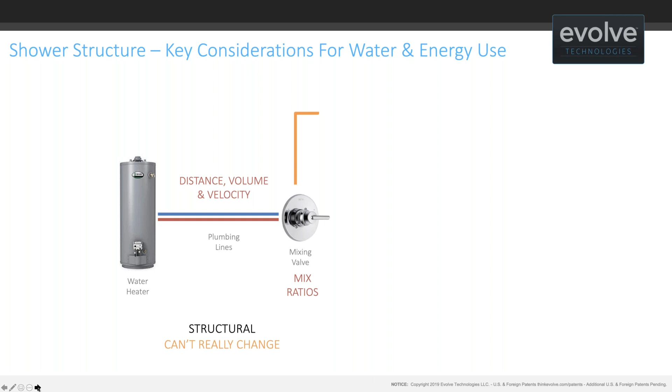On the behavior side, there are really great opportunities for change. So mostly everything we're going to talk about today is how do I deal with the structure I already have in place, which I can tell you is most likely very inefficient, and it has great impacts on behavior. How can I address the behavioral side and achieve something that isn't punitive, doesn't take water or energy away from you, but adds a ton of value in terms of convenience and efficiency for your tenants?

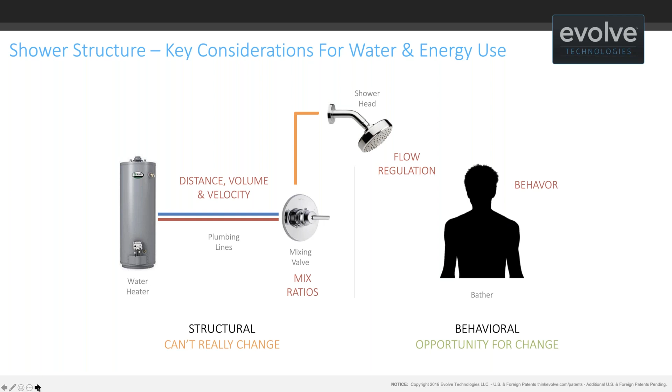In 1992, the federal government came up with the Energy Policy Act, which started to regulate shower head flow rates for the first time. They regulated them at 2.5 gallons per minute - basically saying a shower head, given a normal or typical pressure inside someone's building, apartment, or home, can't go more than 2.5 gallons per minute, which was a big change.

This was all back in the day when everybody said, 'oh my gosh, I don't want a low flow shower head, these things are terrible.' Basically what happened is the federal government put together this regulation, but manufacturers weren't really ready for it, so they didn't have shower heads that could perform really well at 2.5 gallons. However, a lot has changed since 1992.

Many people may be familiar with WaterSense and the new WaterSense showers that have been coming out for several years. WaterSense today puts a limit on a shower head at about 2.0. In fact, it's hard to buy a shower head today if you run down to Home Depot or Lowe's that's going to be anything better than 2.0. The market has basically come in line with WaterSense, which is half a gallon more savings per minute than what the federal government allows.

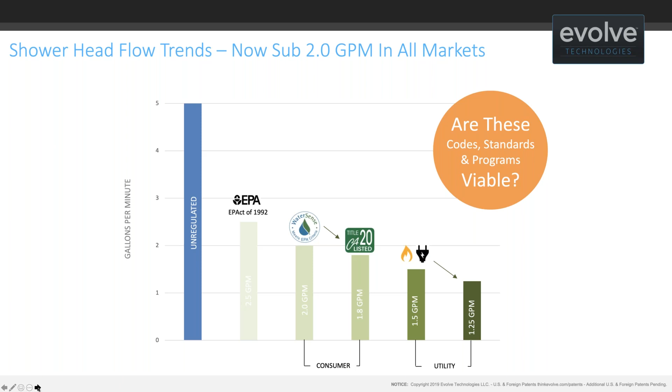And I would tell you, based on my experience talking with people, we're already there. Once you get into the 1.5, 1.25 range, those are the products that are starting to get put in, but it's borderline whether that's going to provide an acceptable experience, or people are going to revolt even more than they have in the past and say, I totally don't want a low flow shower.

It's as much about relaxation and comfort as it is about getting clean. People don't like to struggle with a low flow shower head. A lot of times they don't like how they feel, they don't feel warm enough within them. They know they're sacrificing, and sacrificing in the shower isn't something we want to give up. What's really interesting in terms of behavior is people ignore the information on efficiency - even if you give it to them, they won't take it into consideration. They just don't want anything to do with the low flow shower.

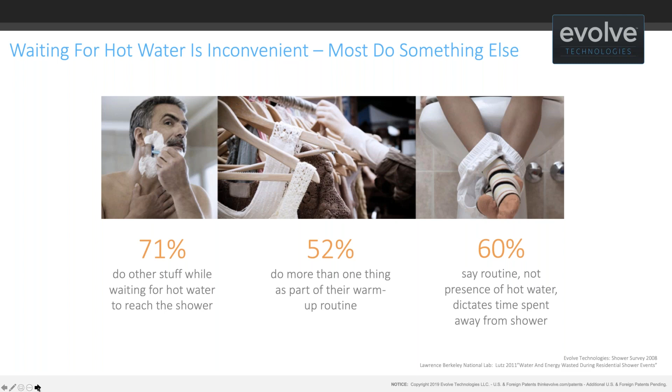Does that make sense to everybody so far? Any questions for where we're at?

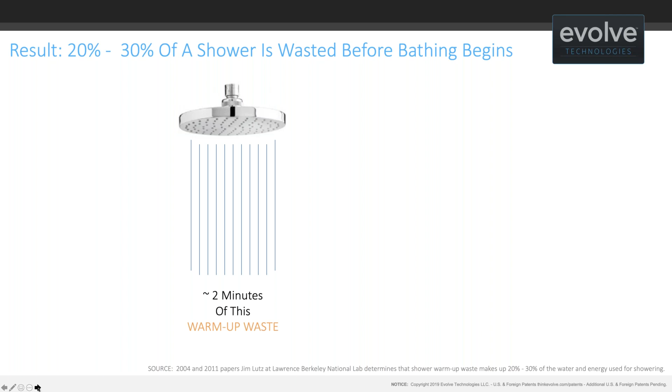So as a result of our behavior and the structure where it takes a long time for hot water to get to point of use, what we essentially see is that a shower breaks down into this: I've got 2 minutes of water running down the drain and 6 minutes of showering. If you look at all the stats, showers on average last about 8 minutes. So 2 minutes is warm-up waste, and I get 6 minutes of actual bathing. It's a pretty large percentage of the shower, 20 to 30%, that's wasted before anybody steps into the shower. This is a huge opportunity for savings - I can save water and energy here without taking anything away from you during the 6 minutes you're actually showering.

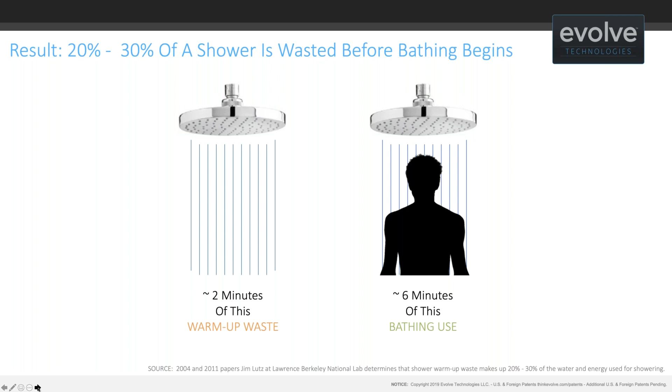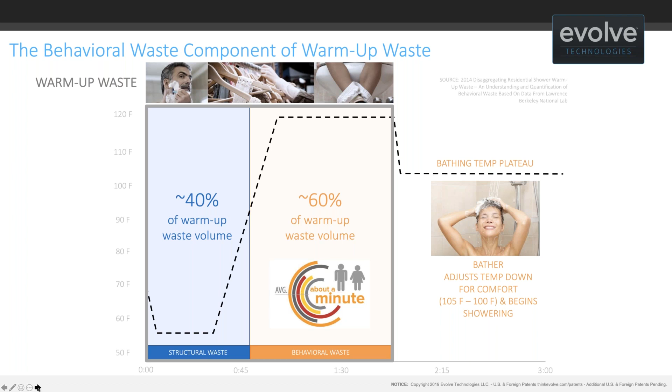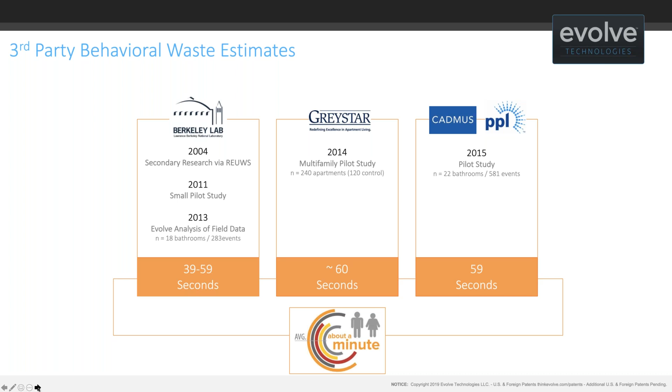We can take a look at field data and studies done by Lawrence Berkeley National Labs. Many of you probably recognize the second name here, Greystar, and then an energy efficiency company called Cadmus, who works on behalf of Pennsylvania Power and Light. All these groups have done various studies of what behavioral waste looks like, and you can see the studies come out to somewhere around 60 seconds. I wanted to show you this so you know it's not just me telling you this - there's third-party verification for everything I'm telling you about behavioral waste. On average, it's about a minute's worth of hot water that runs down the drain before anybody gets in the shower, for every shower taken.

The next part I want to get into is a little technical, to show you that as we put lower and lower flow rates on our showers, this problem of behavioral waste gets worse. I want to take us back a bit to what we talked about before with shower head flow rates. Before 1992, shower heads were unregulated and would just flow as fast as they could flow.

When we're talking about water delivery from the water heater to the shower, the water has to go through a pipe, and I can have thermal losses in that. The thermal losses really depend on the velocity, or how fast the water is moving through the pipe. The faster I travel through the pipe, the less heat loss I have as the water gets to the shower head. The slower I move the water through the pipe, the more heat loss I have. So pre-1992, water was flowing to a shower head at what we'd call plug flow.

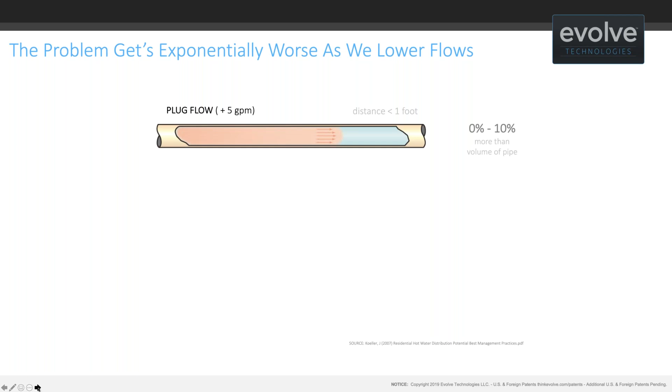It's around 5 gallons per minute. When I flow this fast, I don't really add any more thermal losses that increase the volume of cold water that has to be purged, that structural waste. However, when we start to get into WaterSense, regulating the shower heads, even at 2.5 gallons per minute, I get what's called a long bullet profile - I start to see intermixing in the pipe between the hot water and the pre-existing cold water.

That intermixing happens over a distance of 5 to 10 feet. I get a lot of intermingling of the hot and cold as the hot travels to the shower, and I start to have thermal losses. What actually happens is I increase the volume of cold, non-bathing temperature water that needs to be purged from the hot water line by 10 to 50% more than if I was moving at a high volume. So I'm not talking about putting a low flow shower head and just increasing the time - I'm actually increasing the volume of waste, which then exponentially increases the time. We'll get into that in just a second.

But when I move into a WaterSense type shower head, I get a situation where the hot water starts to slide up over the cold - this finger of hot water sliding over the cold can be shooting out 20 feet further than the main plug of hot water that's in the line. This is due to that flow rate.

I just want to frame this a little differently because it's a really intuitive point if you look at it from a slightly different perspective. Everyone's experienced this at some point: you turn the water on, you're waiting for it to get warm, and what happens is it goes from cold water to lukewarm water, and it stays in that lukewarm, not-quite-hot period for much longer as the water moves more slowly through the pipe.

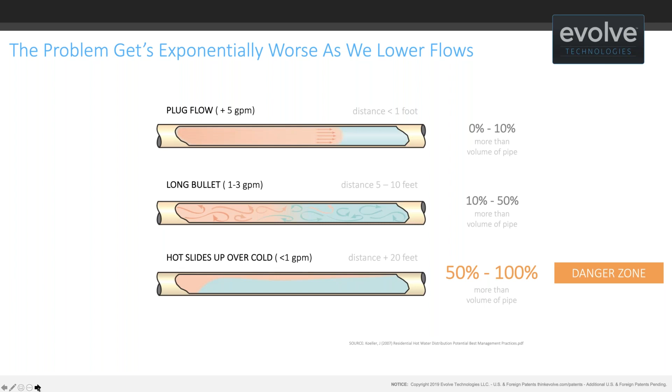So when I get to these lower flow rates, I'm going to show you how quickly they get down on a hot water line. Basically, when I'm moving water at a really slow velocity because I put on, say, a 1.5 or a 1.25 gallon shower head, I actually increase the volume I have to purge from the line by about 50 to 100%. So I'm doubling the volume of structural waste that gets purged. And we run into what I'm going to show you here as a danger zone.

Let's apply what we just learned to WaterSense types of flow rates, and what we're seeing today. As I said before, in California we're at around a 1.8, 1.75 max. A lot of the utility programs we're involved in are doing 1.5, and now they're starting to move to 1.25 gallons. Those flow rates are what the manufacturer states their shower head flows at, but that's not what you actually see inside a home. What we're seeing inside a home is something less than that stated flow rate.

You'll see it right here. When I take a shower head labeled as 1.75 in someone's home, it's probably realistically flowing at about 1.3. A 1.5 translates down to about 1.13. When we're getting into 1.25, I'm flowing at less than a gallon per minute.

It starts to get a little bit worse than this though, when we're talking about flow rates on the hot water line, because when we have a single handle mixing valve, like you all have, we're always mixing in cold water for safety reasons. So even when you're at full hot, you're mixing in some percentage of cold. Typically I'm at around an 85% hot water, 15% cold water mix.

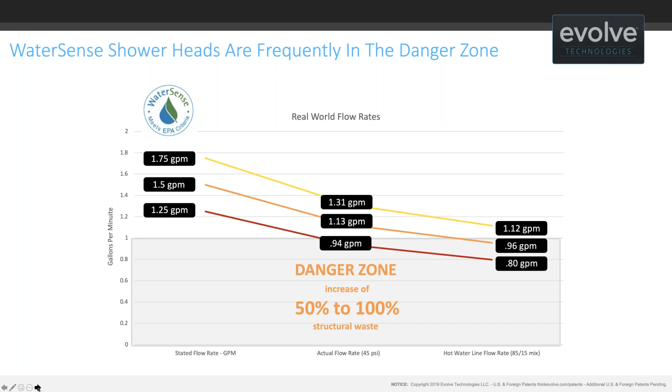What's happening, and we're all kind of experiencing this, is waits that used to be around 20 seconds are now about 3 minutes. So we're dramatically increasing the wait time for hot water to arrive, which is a really huge inconvenience for people.

This chart here will show you what that looks like, and you start to see this kind of curved, non-linear function. We tend to think if we just throw on a lower flow shower head it's linear, but it's not, because I'm actually increasing the volume of water that has to be purged before hot water arrives. At the bottom of this graph you see flow rates: 4 gallons, 3.5, 3, and a red line, which is kind of the maximum time it would take for hot water to reach the shower head, and a minimum, which is about the quickest it could reach depending on various conditions.

And you see this green bar off to the right. That shows us what's happening in the WaterSense world of shower heads—let's just call it 2.0 and below. You can see that at 1.5 I can be waiting a lot, and it gets even worse when we get around 1 gallon per minute on the hot water line. Like I said, somebody used to wait in their house or apartment 20 seconds; now it's 3 minutes of waiting. You can imagine what that starts to do, not only to water and energy consumption, but to people's behavior and how long they're away from the shower.

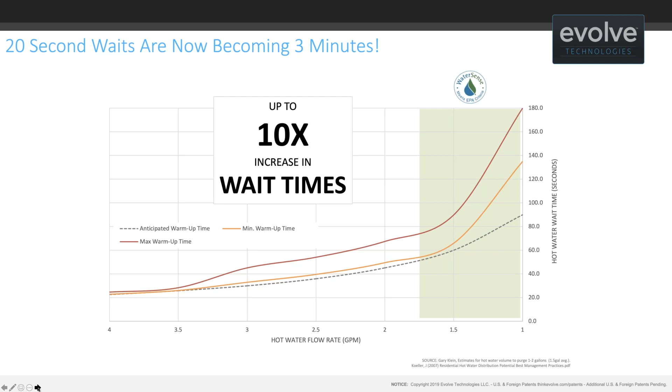We're kind of showing you this dynamic that's happening with people's behavior, structure, putting on low flow shower heads, and everything that's happened. So how do you start to elegantly address behavioral issues, and how do we do that while we actually improve the shower experience?

It's pretty easy. What I want to introduce to you is something called a thermostatic shower valve. We basically call it saying hello to a better shower. This little device sits in between the shower head and the shower arm, and it allows you to have more hot water, more convenience, and more freedom.

That's really what this type of technology allows you to have. It's going to save the water and energy that's getting wasted, and it's going to allow you to keep doing what you've always been doing without changing your behavior. If you have a routine of walking away and doing something else, that's fine—go do what you always do, and this thermostatic valve technology will save the water and energy for you without impacting the flow of your shower head. So whatever shower head you already have and like, your tenants or residents won't have an impacted shower experience. All they'll have is more hot water, more convenience, more freedom.

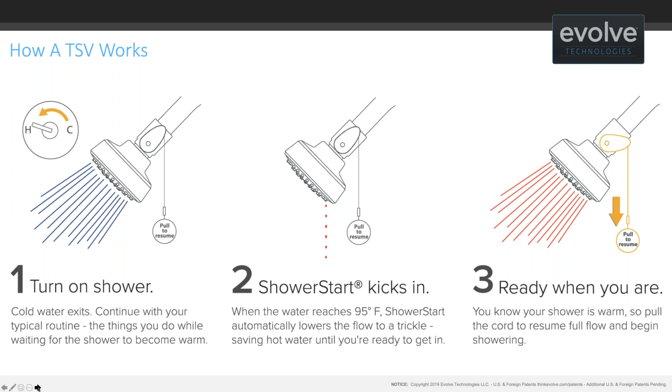Great. So I guess it's time for poll question number 1, which is: would you be interested in receiving more information on thermostatic shutoff valves?

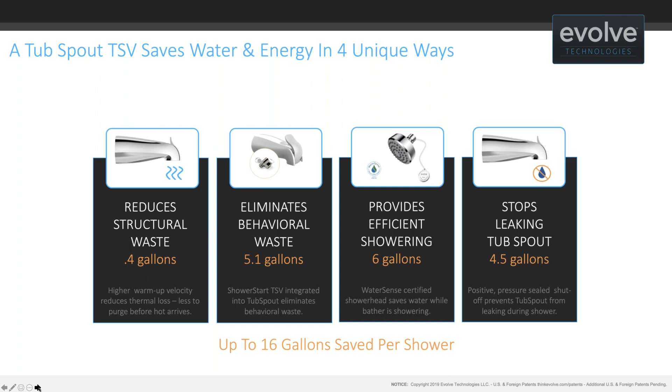The average leak is actually pretty significant. If you have a leaking tub spout, you're probably wasting around 4.5 gallons of water running out of the tub spout while you're showering. You total all this up in these unique areas where we can save, and a tub spout with thermostatic technology can save about 16 gallons per shower. It's absolutely tremendous what it can save.

Here's how it works. Essentially, you turn on your water. The cold water exits out of the tub spout. Because the thermostatic technology is in the tub spout, when the hot water arrives, it shuts off the flow, and no flow will run out of the tub spout anymore. This causes the water to automatically be diverted up to the shower head.

The shower head is a specialized shower head in that it will only trickle until you trigger it to flow at its normal flow rate. This is where the trickle part comes in. So while you're away, the shower isn't just running endlessly, the water's just trickling out. Then you toggle that switch or pull that cord, shower as usual. The whole system resets itself for the next user.

If you want to... Troy, real quick from Tina, she's asking related to this drip, if nobody comes back to actually take the shower, what if they leave for too long and completely forget? Is there something in place that will eventually shut it off, or would the tenant have to go back to turn it off? The tenant would have to turn it off.

Like we talked about before, essentially what would happen is, over a period of say 30 minutes, it would enter into a cycle where it would trickle, and then it would start to flow again because the water behind the valve cooled off.

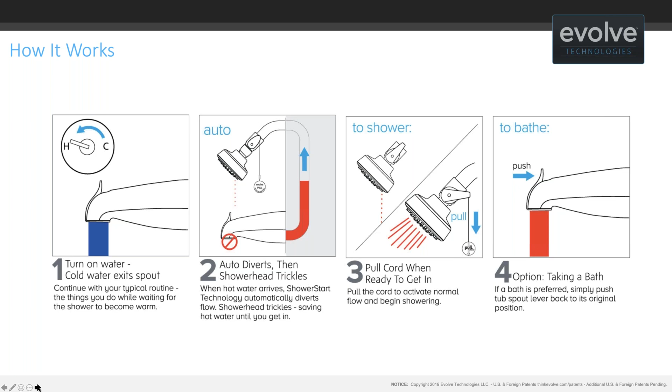Okay, thank you. Any other questions on that? No, not that I see. Go ahead.

We go down. Great. So poll question number 2: would you be interested in receiving more information on tub spouts with TSVs?

Going back to the handouts while this is up here, this system, the tub spout system, is referred to in the handouts as the ADTS system, auto diverting tub spout.

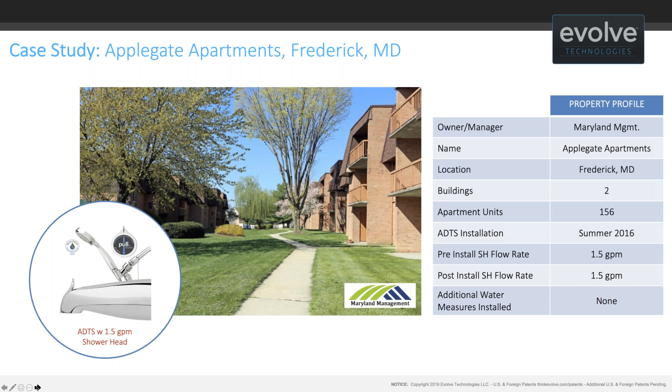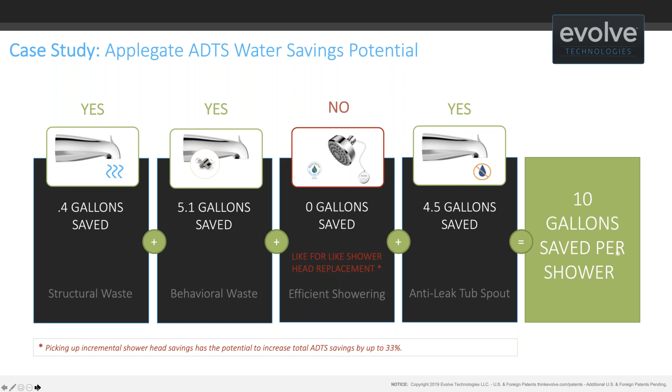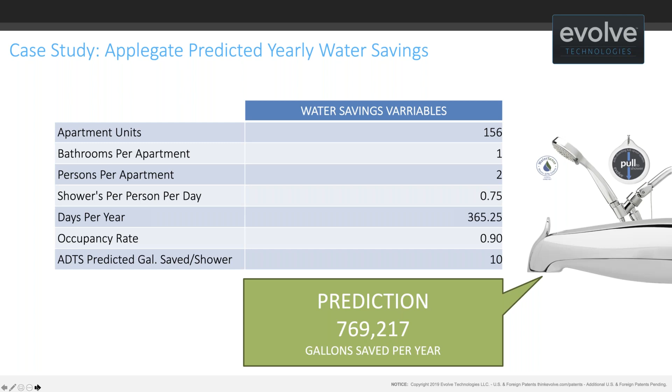So in looking at the complex, we wanted to make some estimations based off of what we know about behavior and what we know about the dynamics of what we would predict this system would save on that property. When you plug in all the numbers, we predicted that in a year they would save around 3/4 million gallons of water. That was the prediction before the installation took place.

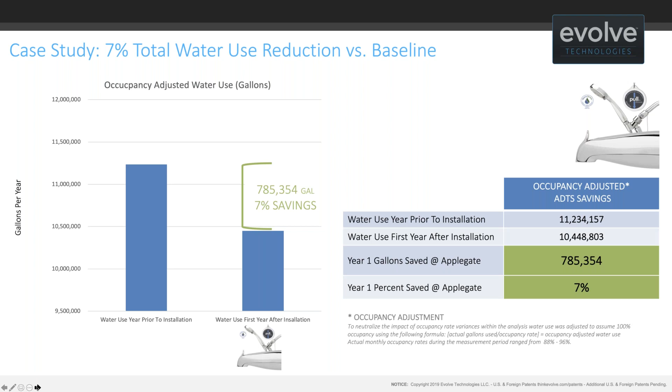This next chart shows us what they actually saved. We were able to take a look at all of their water bills and say, this is the water consumption in the year prior to use, and then we looked at the water consumption for the first year after install. This is occupancy adjusted, because we needed to adjust a bit for variances in occupancy, but basically savings were slightly better or right around essentially what our prediction was. They were able to reduce their total volume of water consumption on the property by around 7%, just by installing this system. So a 7% total water savings on this property through putting in an auto diverting tub spout.

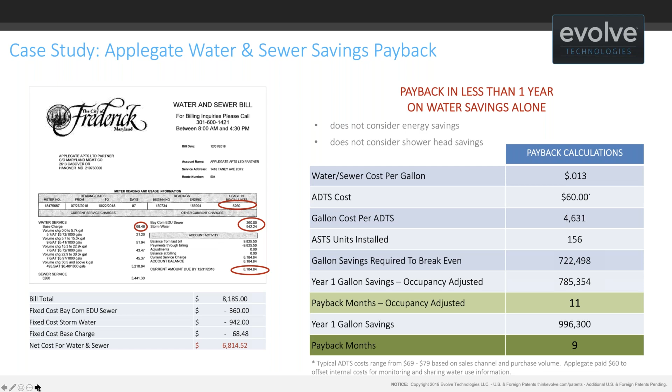And that's just on the water side. We'll start to talk about the energy side here in just a minute.

So on an ROI, what this looked like for Applegate, just on saving water on the water side - basically their water and sewer bill savings, essentially $10,000 a year, was a 109% ROI in the first year. Very, very good return on investment.

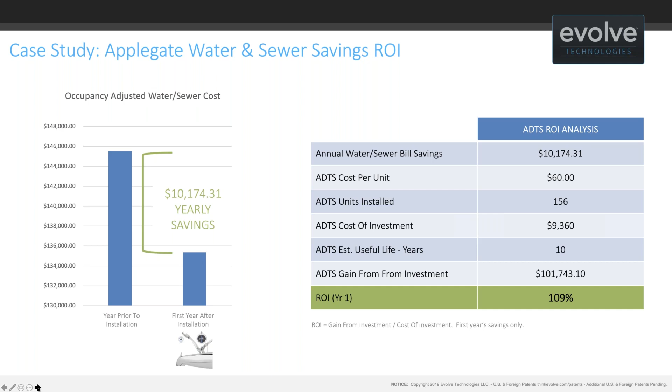Let's start to throw in energy, because obviously the way we make hot water is we apply energy to it - it could be either gas or electric. Depending on Applegate's setup, they weren't picking this up directly themselves, but tenants were getting the benefit of the energy savings because of the way they did water heating in their building.

Basically, what I'm showing you here is based on the number of gallons that were saved. With electric, it would translate in their scenario to about $11,000 saved on the electric side. If you were using gas for the gallons saved, it's about $4,000 saved on the energy side.

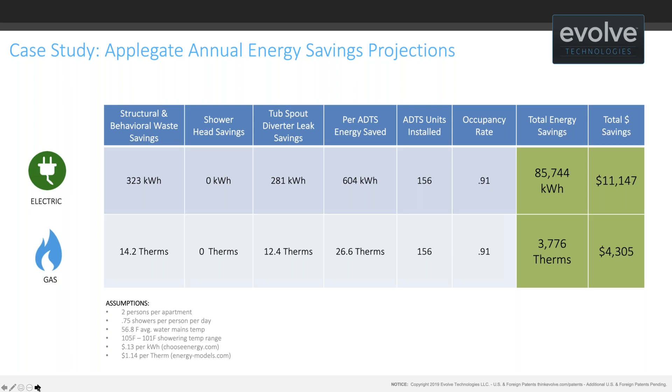So again, you get savings - you're not just saving water and money on water and sewer, but depending on the scenario, either you're directly getting the benefit of the energy savings if energy is included in their bills and the resident isn't paying that directly, or your tenant is getting the benefit because of reduced energy bills. It's a significant pickup.

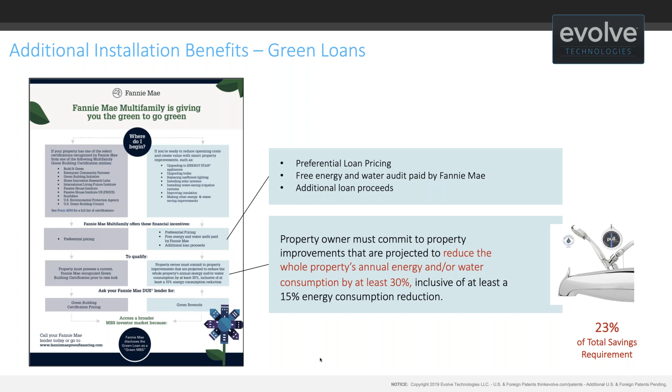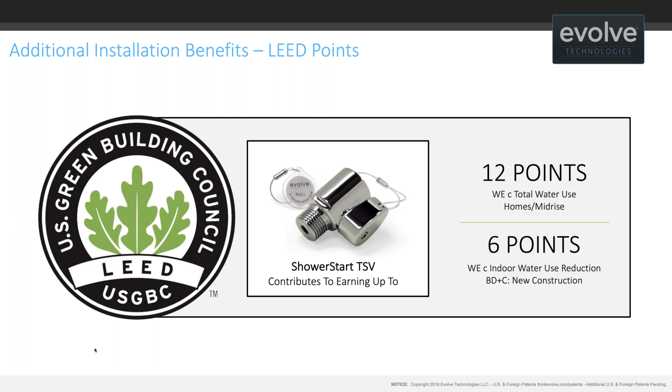I also want to take this opportunity to point out that if anybody's looking at building new and doing LEED, or retrofitting to get a LEED designation on your building, there's a mechanism within LEED to receive between 6 and 12 points with our thermostatic shutoff valve technology. So you can get points within LEED for your building by putting this type of technology in.